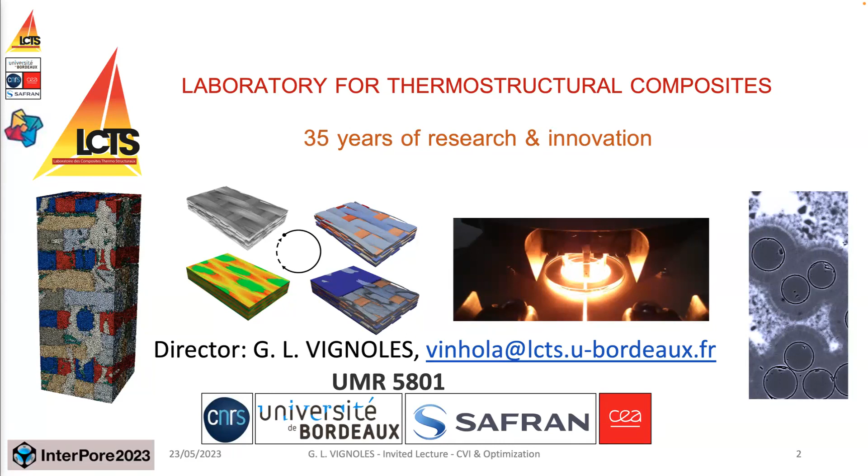We work with high temperature structural materials, which are very high level materials applied in space technology, aviation, energy technology, and industry, aiming for better integration of these specific materials with good design and performance-to-cost ratio. There's a need for research and innovation, and also for expertise and training of future ceramics engineers.

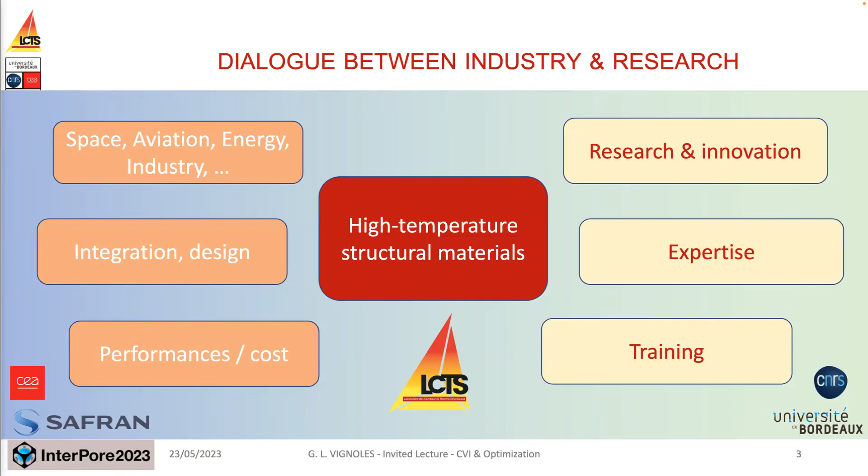Thermostructural composites, what are they? They have ceramic fibers as a reinforcement, so it's about fibrous media, not grains. These look like the usual composite materials, like carbon reinforced polymers, but in this case you don't have a polymer matrix, you have a ceramic matrix, which is brittle, like the fibers.

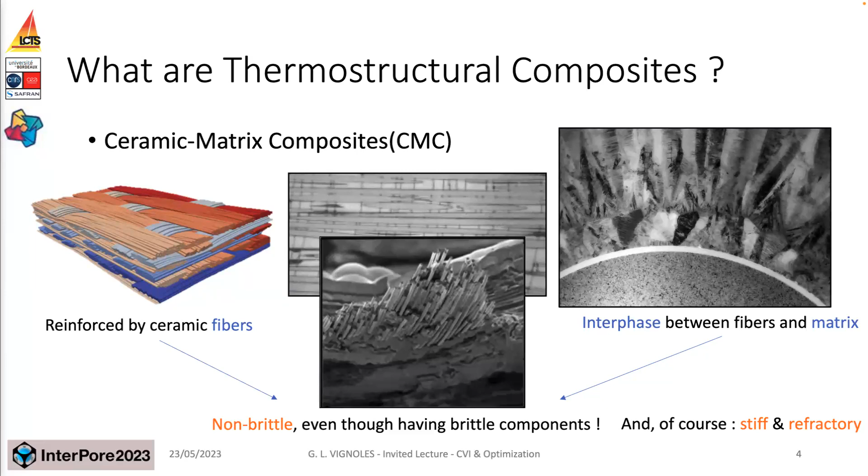So every component is brittle, but the result is not necessarily brittle, because if you tune a nice interface between fibers and matrix, you can have something like delayed fracture, where the fracture facies looks like wood. These materials are non-brittle, but they are stiff and refractory, and can work at very high temperatures.

Current applications range from space propulsion, brakes for aviation and racing cars, thermal protection systems for atmospheric reentry, ionic propulsion, and industry. For example, bowls for single silicon crystal pulling. Future applications are essentially in aircraft propulsion, also as nuclear fuel cladding and other energy applications.

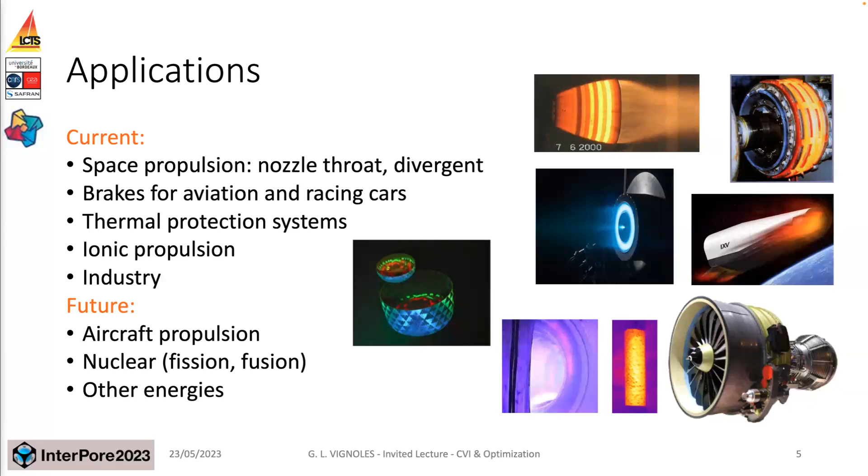This is the spectrum of applications. You can range from a few minutes of use at 3000 degrees down to a century of use at 100 degrees. In the middle, you find, for example, civil aircraft propulsion, which is a very promising market, something like 1 to 10 years for the lifetime of a part at 1400 degrees.

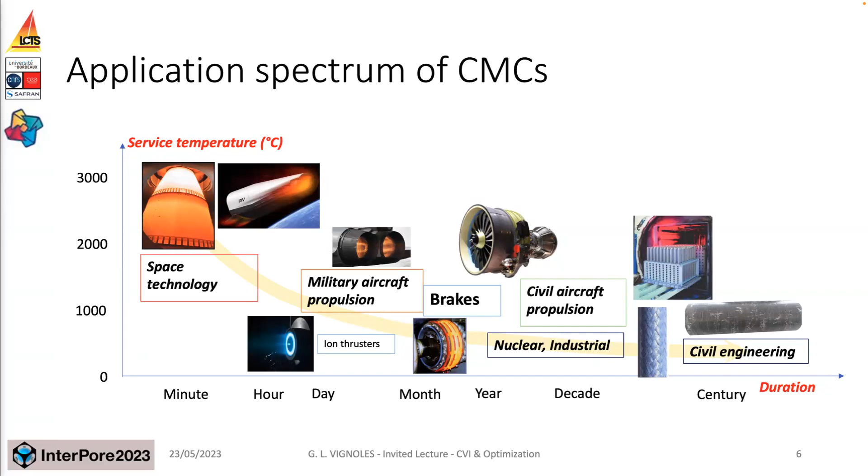These CMCs started with very restricted applications, specifically spatial and military, but now the market is growing, for example with aircraft brakes and aircraft propulsion. They have very promising perspectives because these materials do not depend essentially on conflict minerals, as opposed to cobalt, chromium, nickel, etc. They are very compatible with hydrogen combustion, which is very promising for aircraft propulsion.

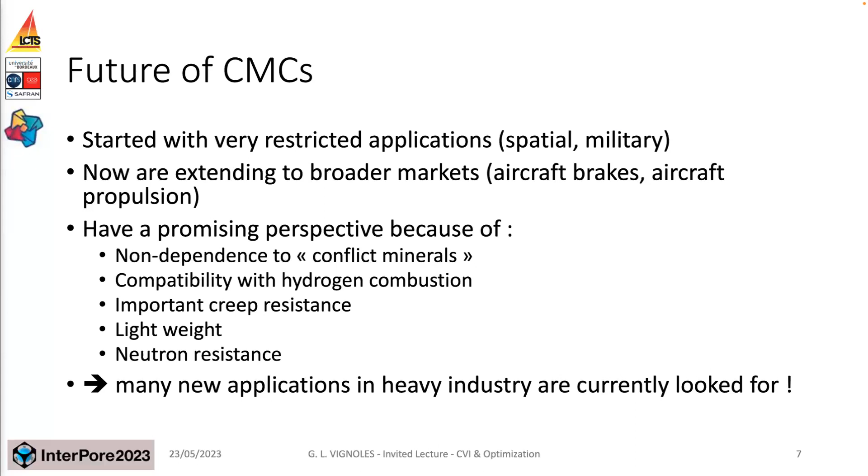They have very good creep resistance as opposed to many metals, and are very lightweight, something like twice as light as many metals. They are also resistant to neutrons, so new applications are being looked for, especially in heavy industry, where there are wide possibilities opening.

Another topic is reinforced ceramic foams. In the same lab, we've been working on them. These have known large interest for heat exchangers, and are currently being developed for example for concentrated solar power receptors, and also for industrial heat exchange more in general. These are very porous structures, but chemical vapor infiltration, which is the process I'll be talking about, is a possible very interesting element for the processing route of these materials.

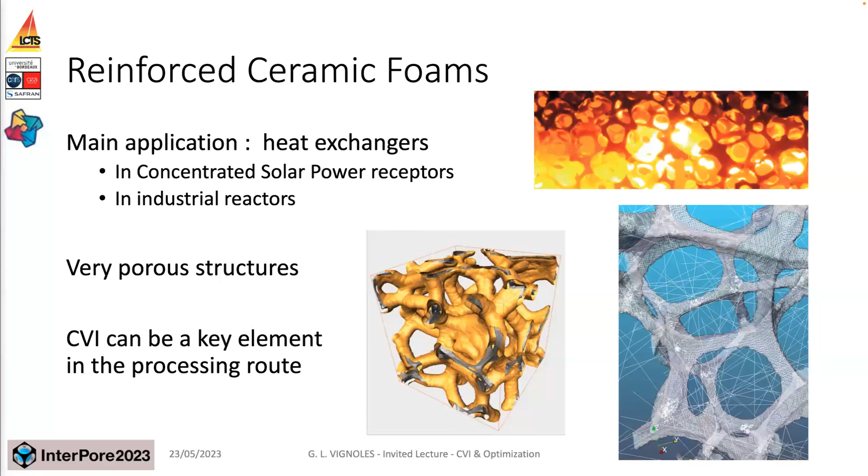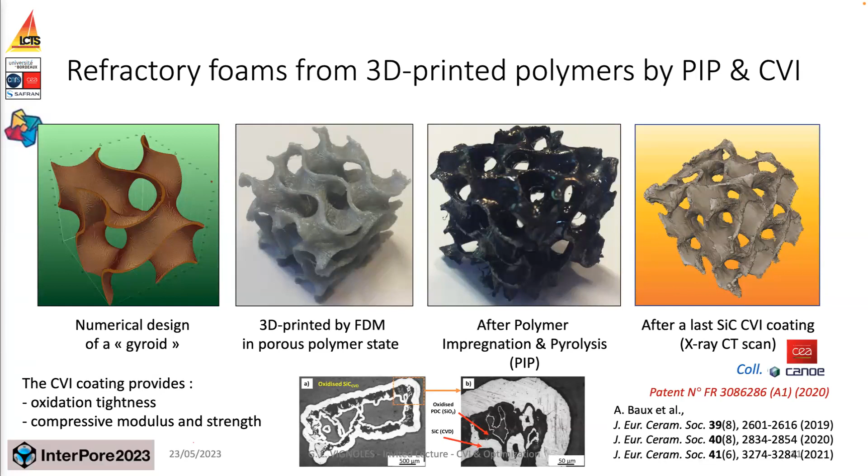I'm stuck. I'm pressing next and I don't have anything. Why is it so? Am I going to give the rest of my talk just with that image? Okay, I will go for help. Is there anybody from... Oh yeah, here we are. Okay, I was just thinking a lot. Don't know why. Okay, fine.

What is the chemical vapor infiltration process? You have a furnace, a reactor chamber in which you allow precursor gases. For example, if you want to deposit carbon, you just put hydrocarbon mixtures inside, plus hydrogen, argon, and dilution gases. Then you have your porous medium in the middle, which is heated by different means, and then the gases will enter.

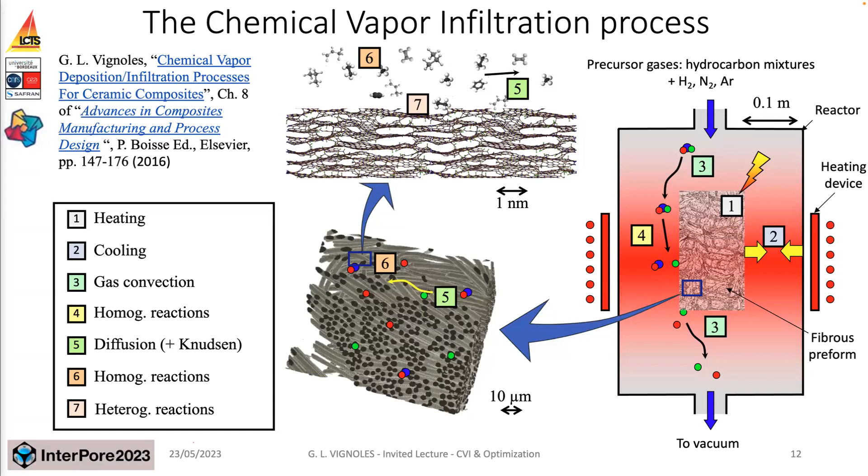Oh yes, now it's moving without my authorization. So the gases enter the porous medium, and then they are subject to pyrolysis, and in the end they will react with the porous medium surface. They will leave a solid deposit, so you will have growth of the solid, and there are some gaseous byproducts that are evacuated from this medium to the outlet.

This is an example of a carbon fiber preform. It can be very complicated. You have woven fabrics, but you also may alternate them with felts, which are non-woven, and you can have some needle punching of all that, so it makes them a very complex fibrous medium.

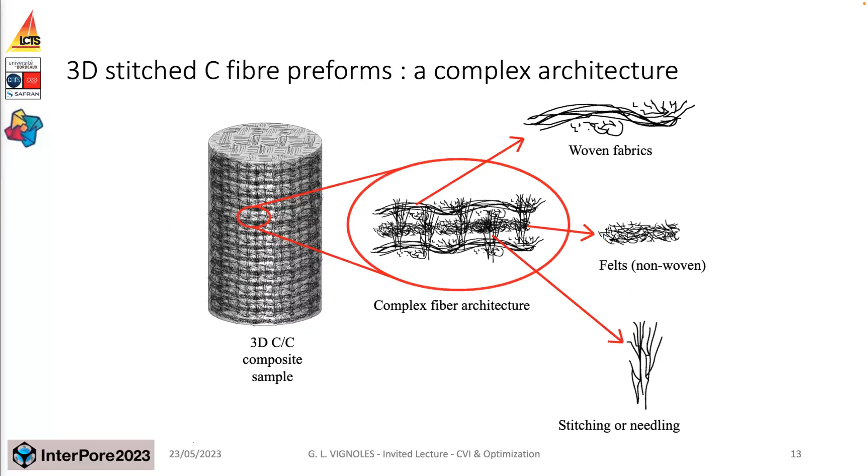The motivations here are that these materials are extremely expensive in their fabrication, so optimizing the production is very important for the industrials, and you want to lower the costs. But the performances should be guaranteed, and in particular we will see the deposit uniformity. There's some pertinence of having a very good numerical simulation that has been consistently validated with respect to experiments.

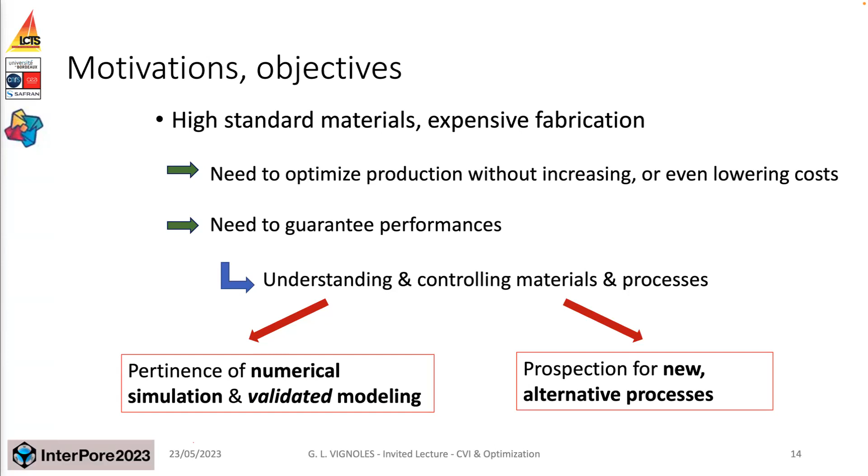And when you have that, you can also prospect for alternative processes. These slides summarize many years of work in which in my lab we developed a multi-physics and multi-scale approach to chemical vapor infiltration. In the first block, we worked on the homogeneous kinetics of hydrocarbon decomposition.

So that we could identify what are the exact species that are going to react with the surface and leave this carbon deposit. In the second block, we performed CFD analysis of the furnace, the reactor with the porous medium inside, without any detail on the porous medium. But if you do so with a flat medium, then you may have access to the heterogeneous kinetic rates. Now, if you merge that with the homogeneous, you get a full chemistry package.

But of course, what is important is also to provide all the mass and heat transfer in the porous medium. So the third block is image-based modeling of heat and mass transfer, so that you can have all those properties at several stages of infiltration.

And all that is merged together in, for example, finite element simulation of the whole material. This gives you a distribution of the deposition rate, of the infiltration degree, the degree of pore filling if you want, and also of the precise nature of the material as a function of time, that can be compared to actual experiments carried out in our very lab.

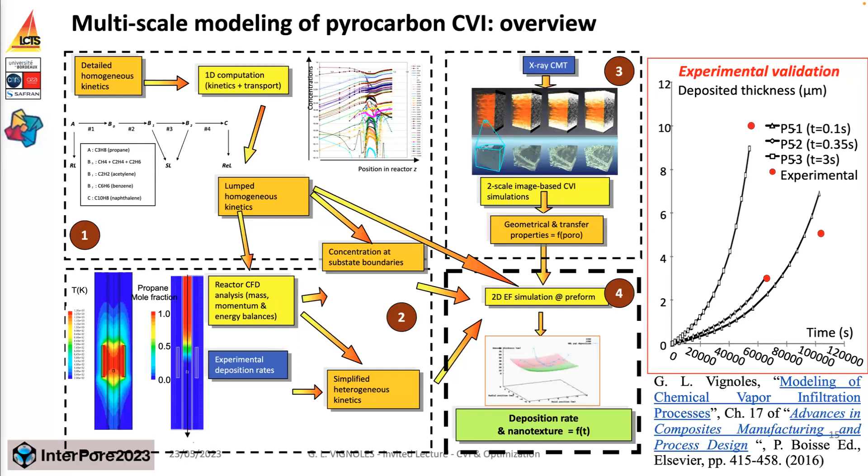So we could validate this whole approach. I will give you some more insight into our work on structure to gas transport relationship.

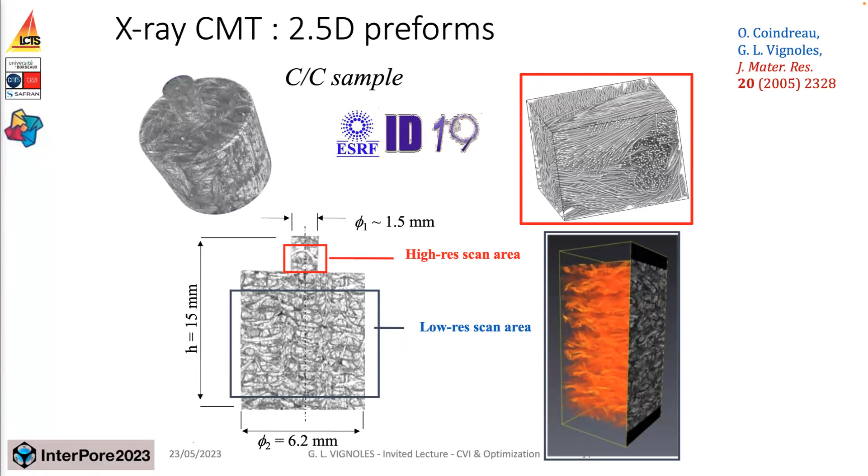This is old work now, but we went to ESRF many years ago and had low resolution and high resolution scans of these porous media. From those images, we could extract lots of information, for example, the distribution of internal surface area as a function of porosity, elements we could relate to fiber growth models and percolation models.

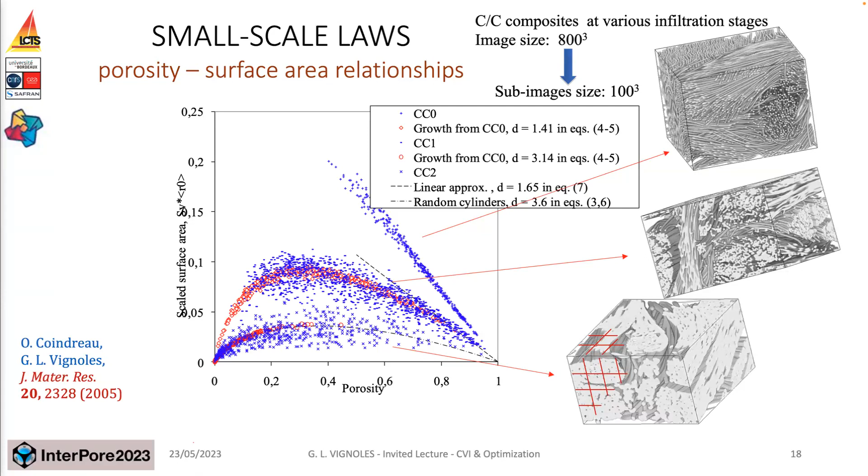And we could do the same, of course, for foams, which have been reinforced by CVI deposits here.

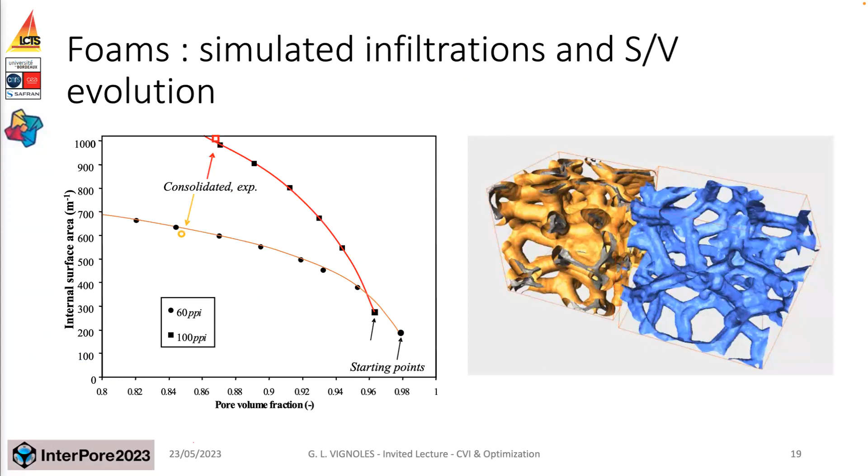The other part of the modeling is to address gas transfer in these porous media. In this case, we have basically three types of possible gas transfer: diffusion, interdiffusion of different gases; viscous flow, which is the usual Darcy regime; and in the middle, the rarefied regime called Klinkenberg or Knudsen flow.

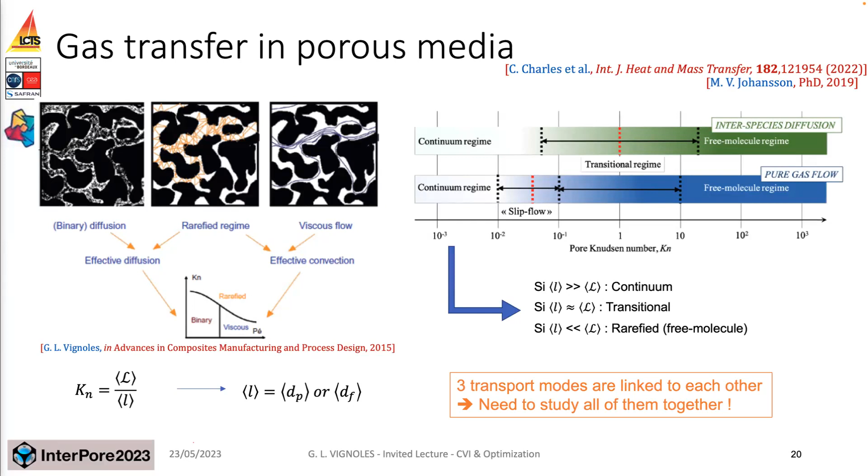So we have three transport modes and they are linked to each other. We chose to study them all together, even though in most cases, for example, Darcy flow is not important in CVI.

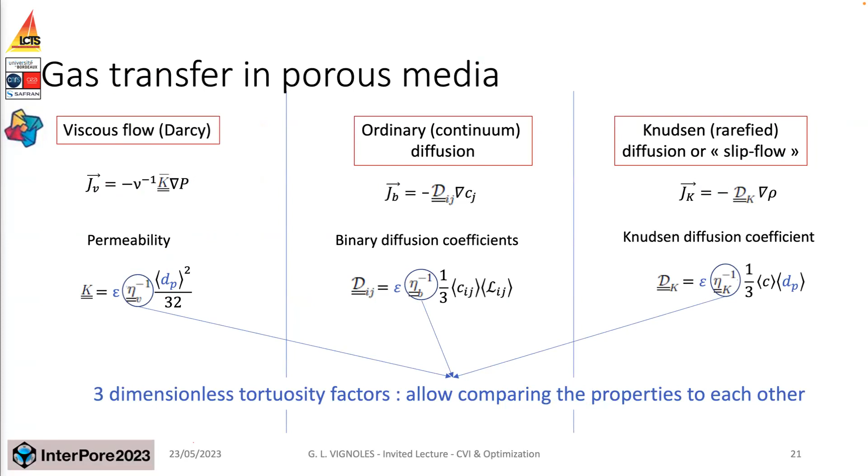You all know that we can boil down all the information if we make some kind of averaging of the transfer to three dimensionless tortuosity factors, which compare the ideal pores to the actual pores. But these tortuosity factors are not necessarily the same for all the transfer properties.

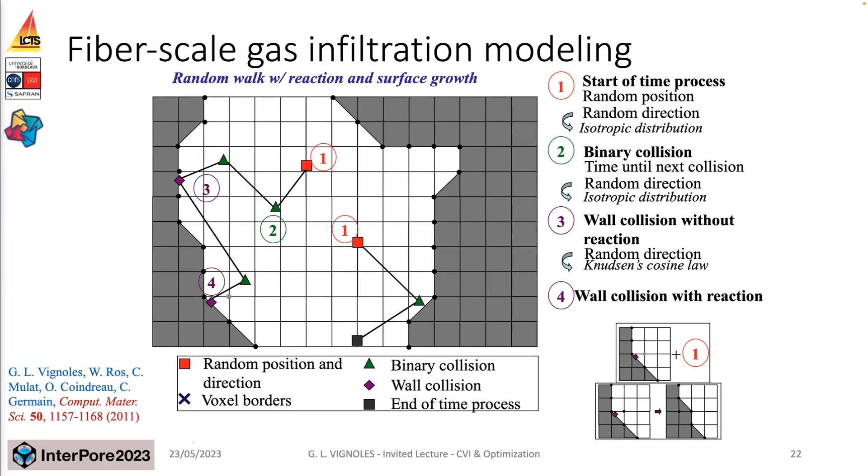So I developed a code on random walks for the simulation of rarefied gases. It's very appropriate because it's like a natural idea you have when you think of kinetic theory of gases.

So, yes, random walks are very convenient because you can work with very large images without any important memory overhead. So it's very practical for this.

So we simulate here, depending on the density of these green triangle events, from continuum diffusion down to Knudsen diffusion, very conveniently, with the representation of a binarized porous medium.

Moreover, it's rather easy to simulate infiltration. The important infiltration parameters in dimension are two dimensionless numbers: the sticking probability, which is a kind of measure of the reaction to transfer ratio, and the Knudsen number, which is the degree of gas rarefaction.